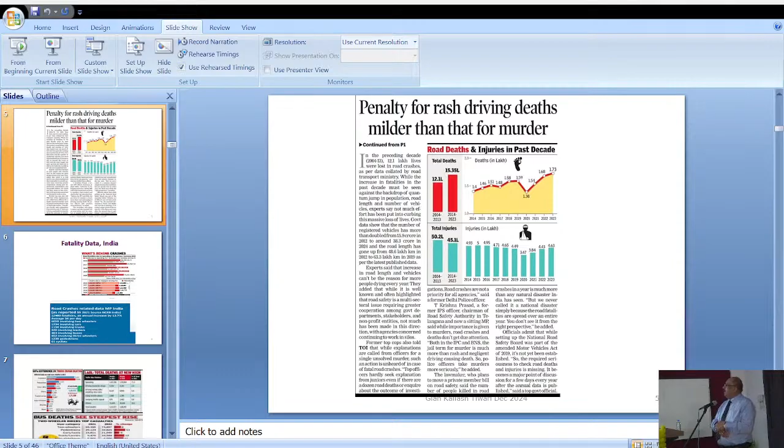Next, please. Again, see, as you can see that after COVID, the trend, the yellow and red line - from last year, except for COVID, we are continuously seeing the numbers increase.

And then accordingly, once we know that, we have to start having preventive measures. Next please.

Again, it's the type of vehicles, what changes are taking place. As you can see, from 2021 to 2022, for buses there has been a considerable increase, a significant increase of 29%, and for pedestrians, rest is 13%. So this we have to know.

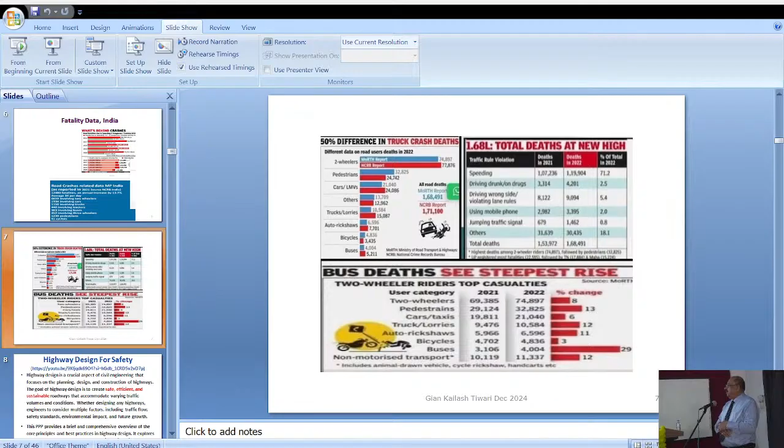So on that basis, we have to go for what we call the importance of safety for design. Our ultimate aim, there is a video I have given the details where you can see how highway design for safety, why it is important. Basically our approach remains that alignment and landscape should be safe. Then all the geometric elements and features of the road should be safe. And then whatever the cost is important. So these three elements are the most important when we consider highway design for safety.

So the purpose is that our roads should always be safe, efficient and sustainable, and that is what Mr. Garg was telling, that ecology and environment matters. So once we have that landscape and alignment properly, then we can take care of that. And again, the cost is important.

So today, in this entire presentation, what we will be discussing is an overview of the core principles and best practices in highway design, and then how road geometry, lane width, sight distance, and the importance of balancing safety with functionality matter.

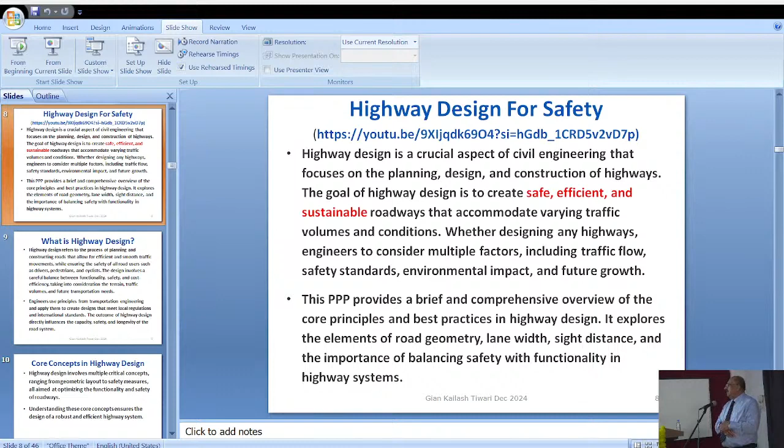So again, what is highway design? It includes everything from planning to operation and maintenance. Different aspects are there for different road users, different conditions, and different environmental conditions.

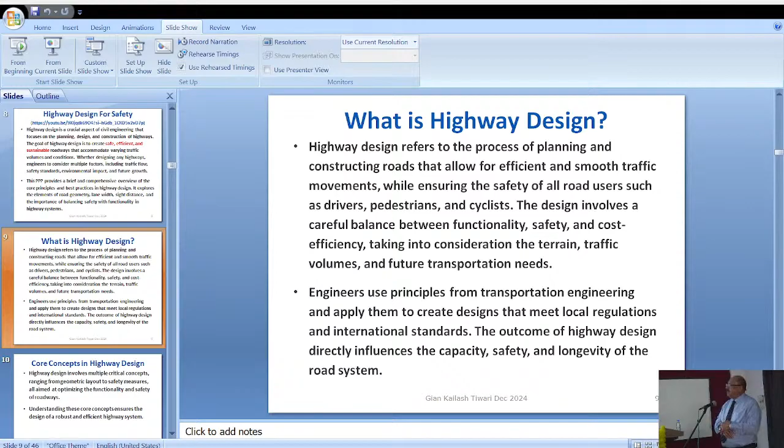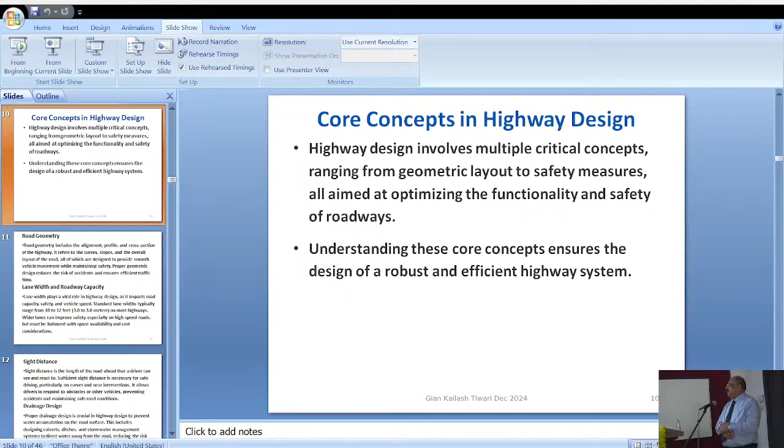I will go quickly because time is important. Human factors, vehicle factors, those characteristics, we have to understand very well. Road geometry, lane width, roadway capacity—these are all important aspects.

One of the things I was discussing, which I will go into in detail, is what we call the safe system approach. Norway and Sweden started this almost 30 years ago, and Holland also started it, with sustainable safety aspects. These have become very good examples of highly effective approaches and action plans. So rather than reinventing the wheel, we should try to understand and use that.

Otherwise we will have to do a lot of research, like what you have seen, just to reach the conclusion that we have to provide a pedestrian walk and subway—doing all this data collection, data analysis, simulation. Rather than doing that entire exercise, which is also not possible due to time constraints, cost constraints, plus knowledge constraints, we already know very well that segregation is the most important thing.

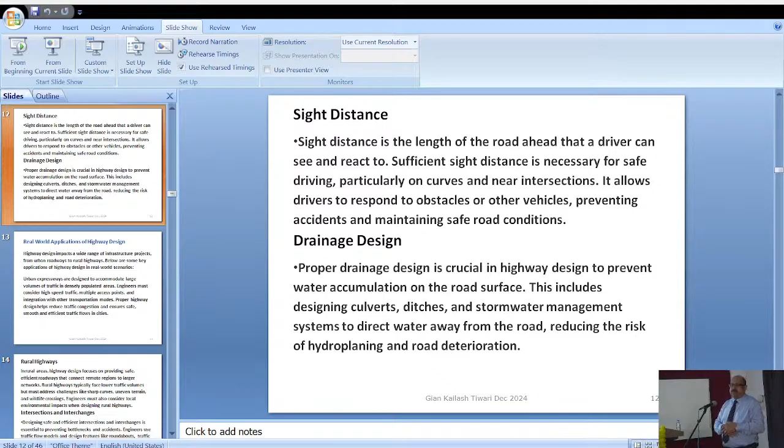So footpath or sidewalk is the first thing to be provided. Then crossing facilities at proper locations are important. Based on the traffic volume—what we call the warrant criteria—first is a simple two lines, then we have the zebra crossing, then a proper speed table or raised zebra crossing, then a push button signal for pedestrians, then we can go for a one-way type of treatment, or next is the grade-separated pedestrian overpass or underpass. These are all different levels, but ultimately we want to minimize and reduce the conflict.

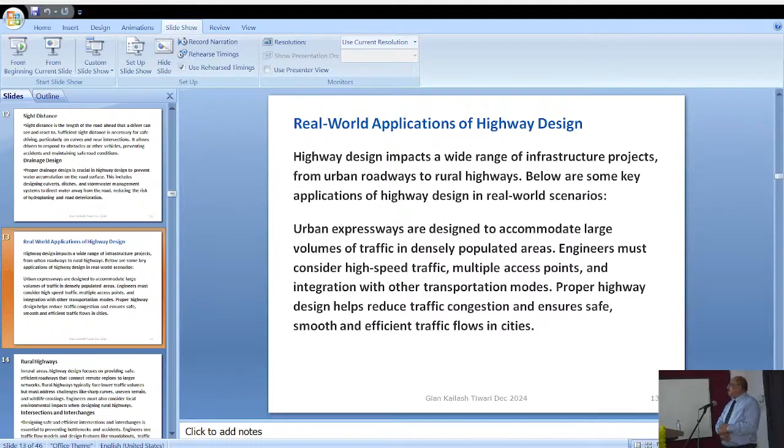Depending on the type of highway, like expressway, different designs are there. For urban primary networks or national highways, there is another set of designs. And then for rural highways we have designs. Naturally there are also intersections, and wherever there are intersections, based on the conflict points, we have to see what type—whether uncontrolled, signalized, or roundabout. The main aim, as I mentioned, is to reduce the number of conflicts.

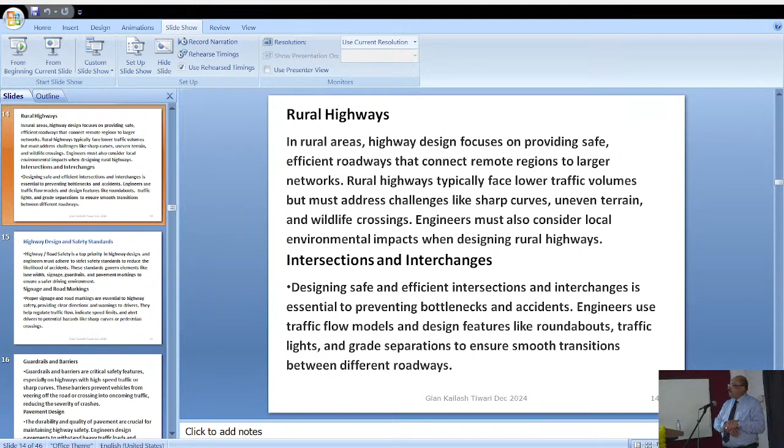And if conflicts are there, we have to see the angle of conflict - that's important. One of the very important aspects from a safety point of view: if at 30 kilometer per hour speed limit a pedestrian and vehicle collide, out of 10, only one will die. At the speed of 50, 5 people will die. And at the speed of 70, all 10 will die.

So wherever there is a possibility of a head-on collision, like speeds of 70 and above, we should always avoid those conflicts, like by providing a median. We can go up to those speeds with a simple undivided road, but the moment the road has a speed of 70, we should definitely provide one - and it's not necessary to provide concrete barriers of about 1.2 meters.

You can provide a 1 meter gap central median, like what we start with - a single line, no overtaking.

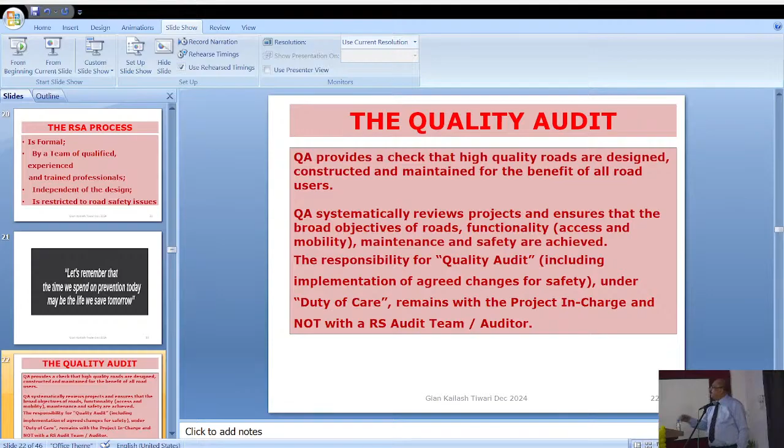This is very important: if you have crash data, that is what we call the reactive approach, meaning the accident has already occurred. Then whatever data we have collected, what we get from police, we determine the different types of treatment we can do, and finally improve safety through what we call black spot identification and improvement. That is for existing roads where data is already there.

IRC has a procedure which is quite cumbersome, and a lot of data is required for 3 years - number of fatalities, number of crashes, serious injuries - then you do analysis, prioritization, ranking, and then come out with results. But road safety audit, when done for a new road, does not require that data. That is the beauty or importance of road safety audit.

Mostly people get confused, and even agencies, when they write terms of reference, say you have to collect the data. But when there is no road, or you are entirely upgrading the road from existing to say 4 lane or 6 lane, in that case you don't need that data. If it is there, then it is good, but basically you are not doing that.

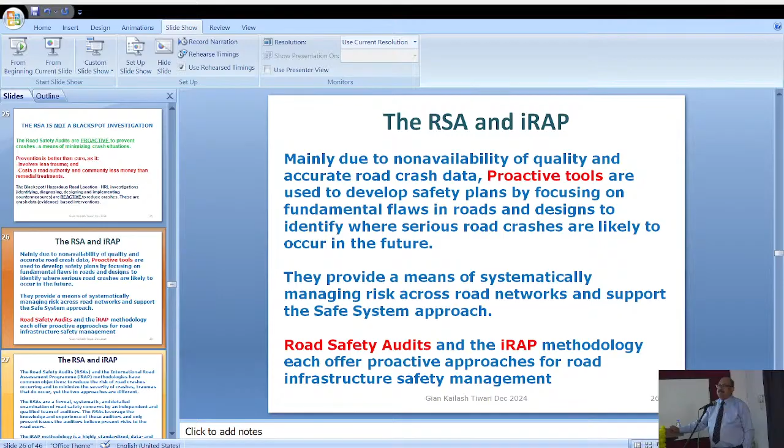Australia, around 1990 - first audit manual was prepared in the UK, then Australia and New Zealand started following that, developing their own audit manuals. My friend who prepared it in Australia, Mr. Phil Jordan and others, prepared one for India around 2010, and now it has been revised. They have the checklist that is to be followed.

iRAP is quantitative, based on extensive data collection. It is a highly standardized data and evidence process that produces quantifiable safety metrics such as star ratings and investment plans. For different users - two-wheelers, pedestrians, car users, and truck and bus users - it identifies what is to be done and what the safety levels are, then gives a rating from 1 to 5 stars.

So there's 1 star, 2 star, 3 star, up to 5 star of the design, and then it is to be implemented. Now it has been globally agreed that all new roads or new designs should have a minimum of 3 star.

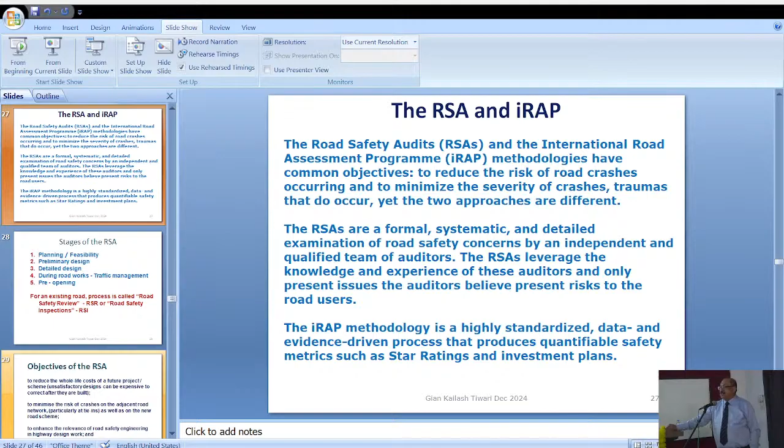Again, there are different stages. For existing roads, we don't call it road safety audit, but road safety review or road safety inspection, RSI. Many people don't understand that these are two different things. RSI is for existing roads, and road safety audit is always for new roads or new designs.

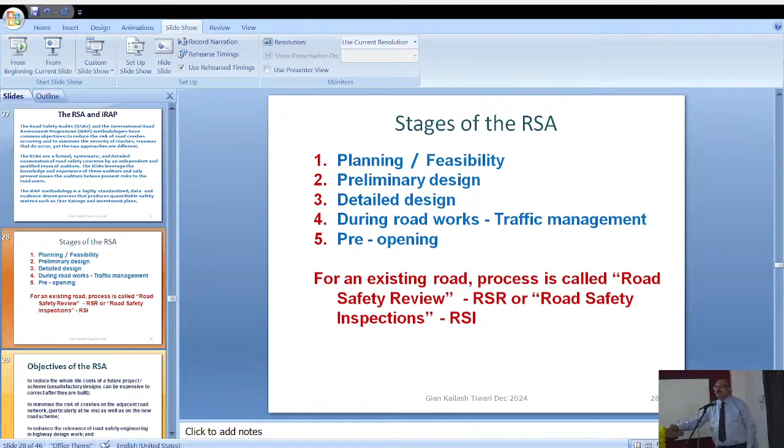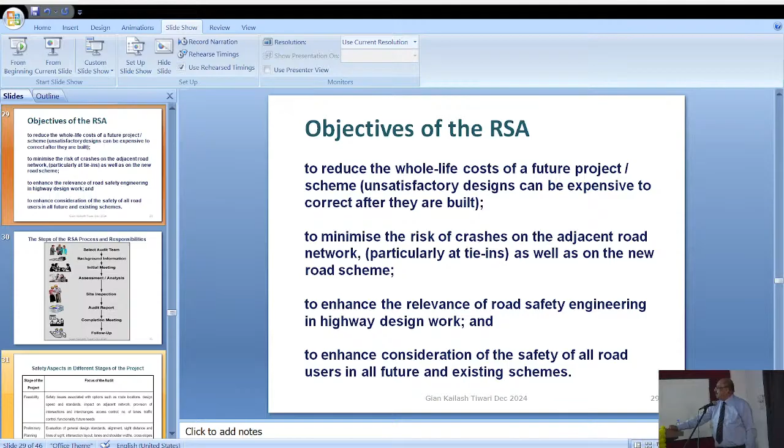There are objectives to minimize the risk of crashes and minimize casualties. Again, it is a process: select the audit team, and ultimately carry it through.

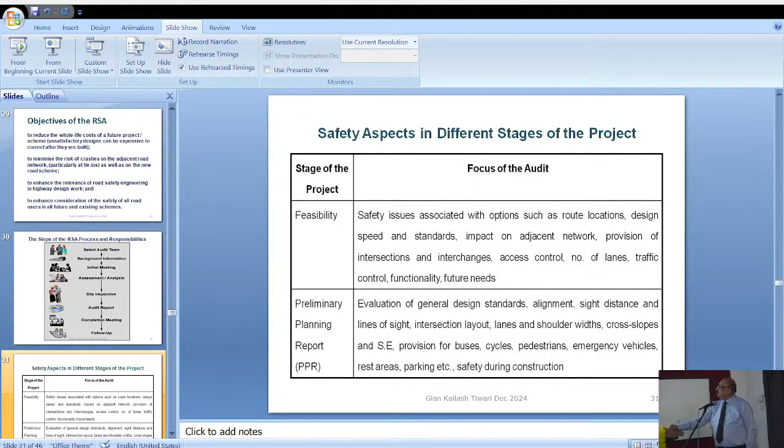It is the agreed recommendation, not legally binding. Throughout all countries like UK, Australia, America, or India, it is not legally binding. Whatever you recommend, it is not mandatory to implement. Depending on what the client agrees, depending on budget and time frame, it has to be implemented.

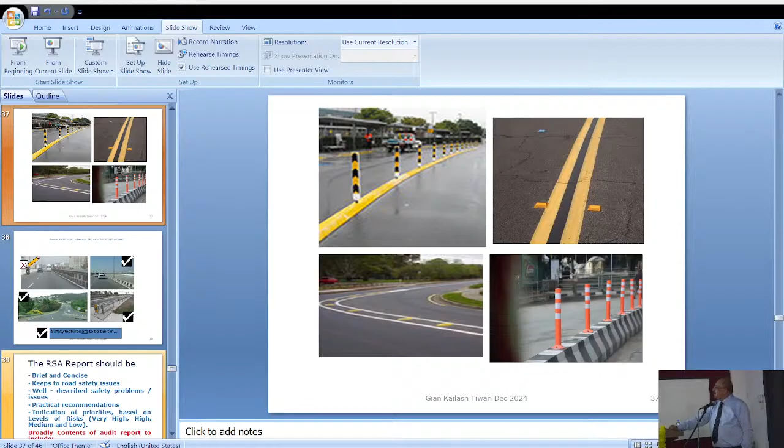Then you can make a width like 1 meter wide, provide an audio-tactile line, or provide a concrete barrier. With a concrete barrier, one has to ensure the height and type of the barrier is important. You also have to provide gaps, as you can see with white lines, along the medians.

The correct practice is that it should be mountable, not non-mountable, but at the same time, if people are crossing - women in saris, children - they should be able to cross or use it as a refuge. So in urban areas especially, where there is pedestrian crossing and people have to cross in a low speed limit area, you can provide those medians.

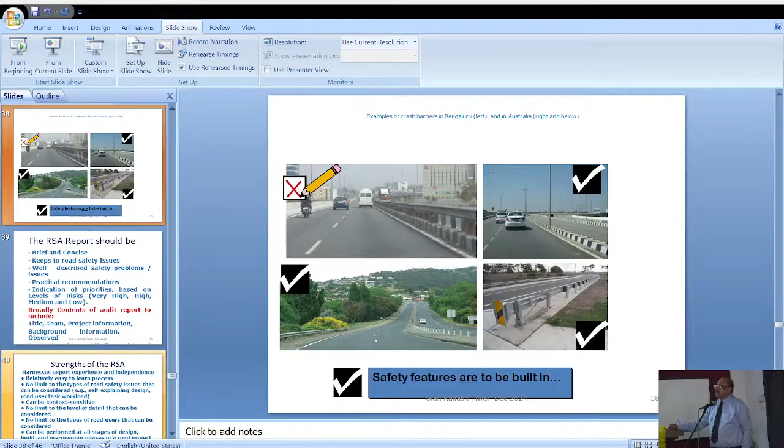So that is important. In between, what is now becoming very popular is wire crash barriers in the median, now in Australia, New Zealand, and in India also slowly getting popular. It is a very low cost measure but highly effective to avoid and prevent those head-on collisions.

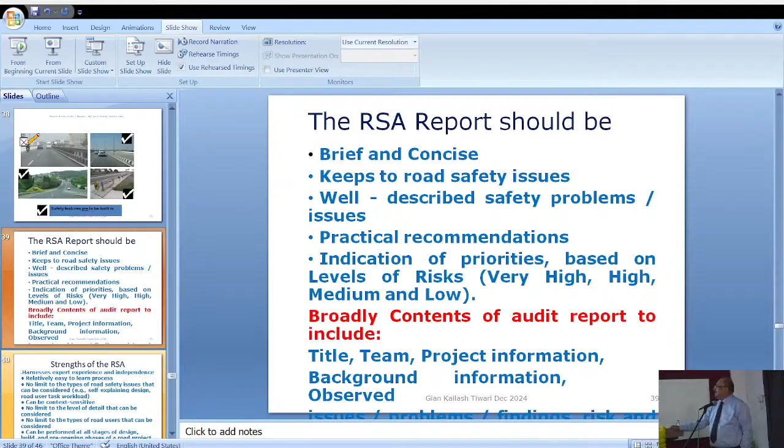So again, whatever report you are preparing, it should be brief. It should indicate the priorities, and whatever information is there about the project should be mentioned.

So again, the strength of road safety audit is that it is very, very useful, especially because it is independent of the designer. And the people involved are qualified and experienced.

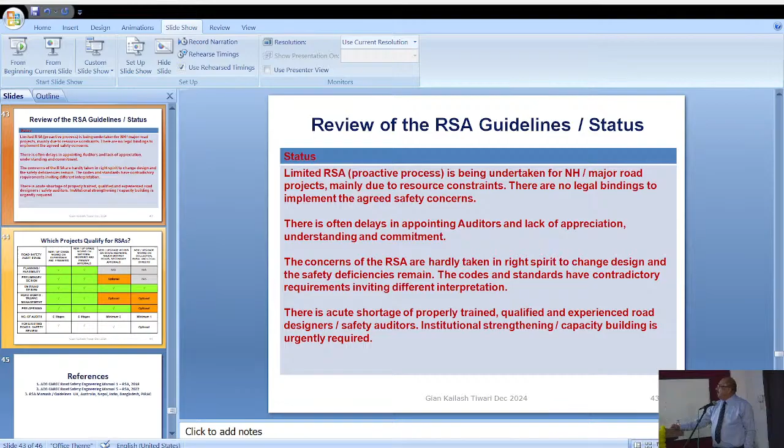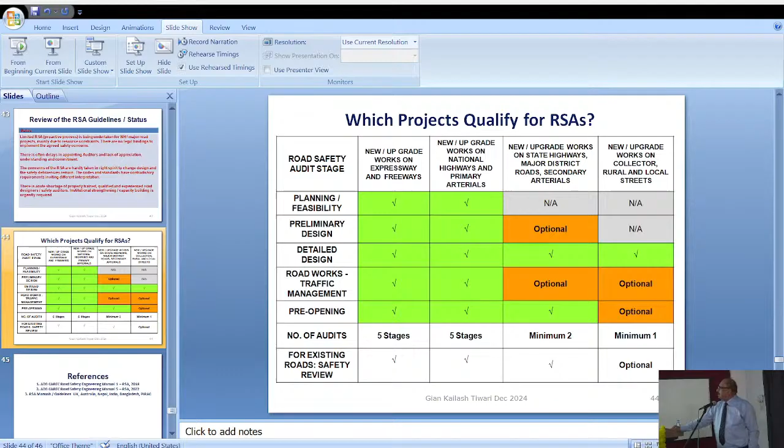So this is just like a guide chart which is being used, and which is also in the Indian Roads Congress publication and guideline - they have mentioned that one. There are different references, and there are more than 20 manuals on road safety audit, and similarly manuals on black spot improvements. I have used most of these manuals in different projects, depending on the country and the terms of reference.

So we can make roads and roadsides safer for all road users. Thank you.